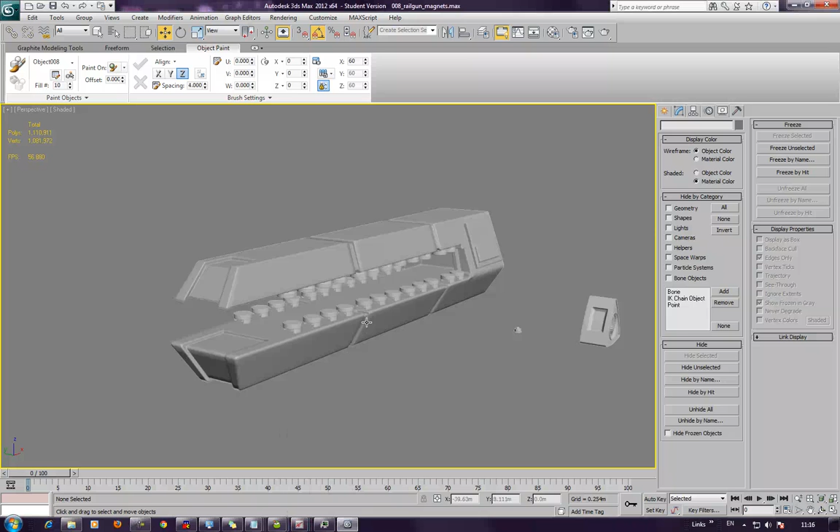Alright, we have basically an array of magnets here now. They look a bit like crocodile teeth, truth be told. However, the idea is that you have this kind of LIM array and it's going to shoot stuff out, and that's going to be cool. Okay, this is our interesting shape that I quite like.

Now, it's supposed to actually be part of a prop engine array. However, I don't see why it should just be a prop engine array if we can use it for other things, which is kind of what I want to do, to be honest. I mean, look at it, it's lovely, lovely. Oh, lovely you are, lovely. Sorry, I just like saying that word sometimes.

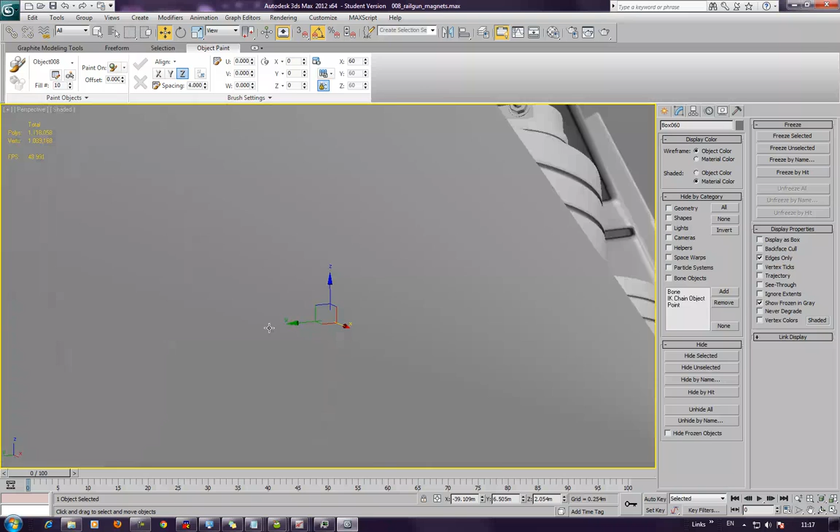Okay, so we're going to assume, kind of... why are you not moving? Oh, you're saving. We're going to assume that this is quite a lot smaller than it is, just so that it fits inside it. And we're going to bring that down to there.

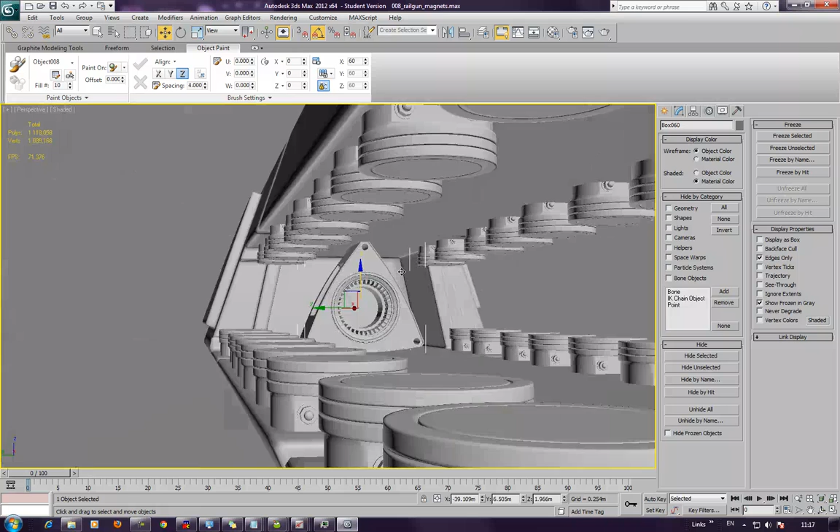Now you'll notice we have these handy dandy holes in here, and I never ever considered when I was building this that I'd be using it for a big robot railgun. In actual fact, when I first started building these sets, I was like, oh, I'm gonna make a transformer, which is a cool plan, but I didn't.

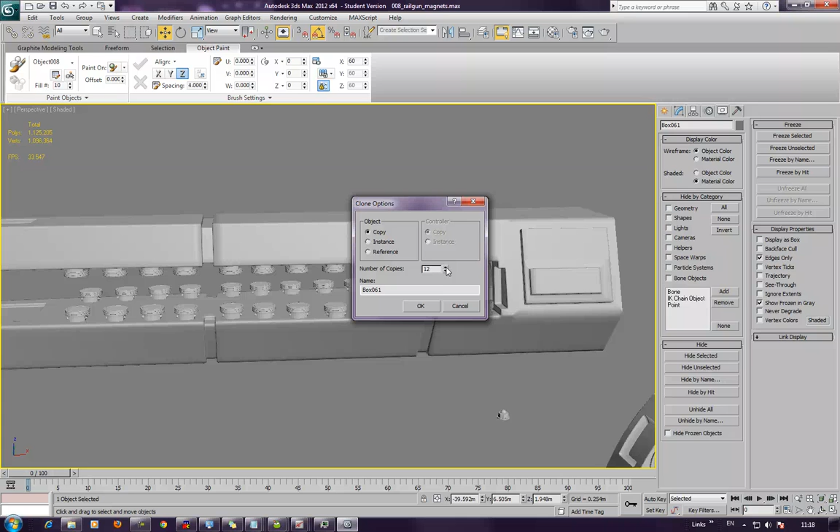And there's a reason I didn't, incidentally, so don't get all like, oh, why didn't you? I didn't because there's already tutorials on that sort of thing anyway. Some really good Japanese ones, a couple of good American ones, from Gnomon. Don't hate Gnomon, I advise you. If you like their stuff, use their stuff. But what I wanted to do was build a little something slightly different.

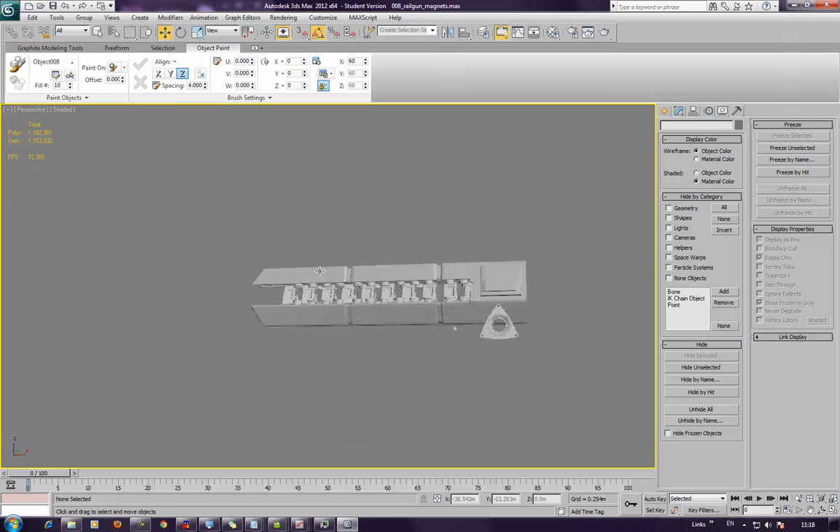It was kind of custom to me, so I felt that by the time I'd got anything even remotely close, then it would probably be too late, really.

I think it'd probably work out better if I lined these up with magnets, because then that would have more semblance of order to it. And then keep that one there, yeah? Do you see where I'm going with that? I hope you do.

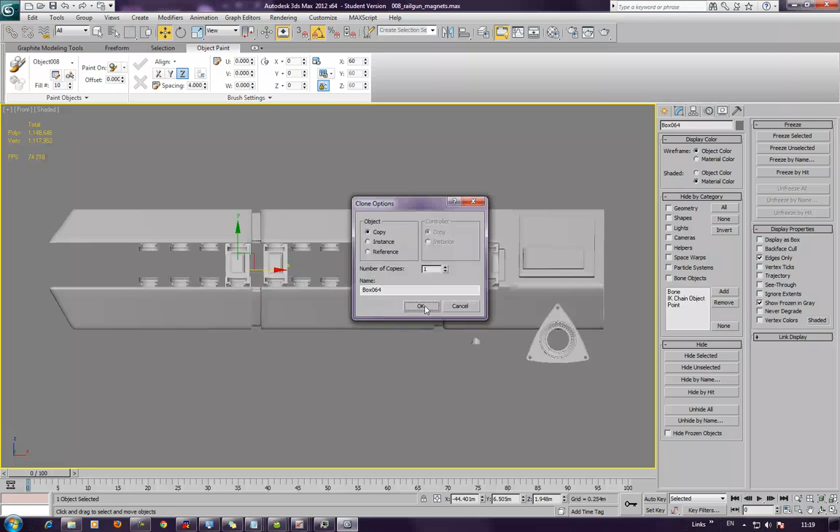Basically stick them in between the magnets. I don't want to overcrowd the inside of the weapon, you see. It's, in my opinion, it's kind of going to be silly if I do.

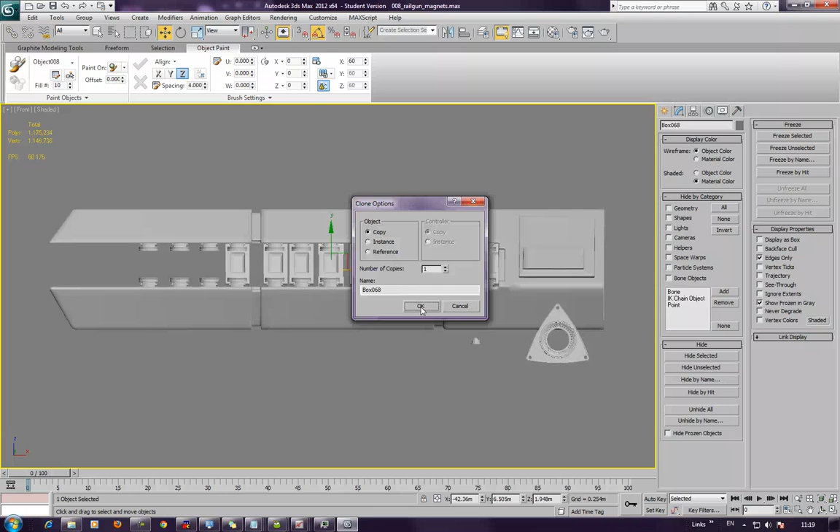I could add kind of a plethora of pipework and tubing to this, and I may yet. So don't think you're off the hook, because you're not.

I would actually like to do that in this section. You're like, oh, why? Why, Chris? Because we want a model that looks good, that's why.

How often have you looked on 3D sites, where they have galleries, and gone, oh man, look at that, I wish I knew how to do something that detailed. That's the whole point of these tutorials.

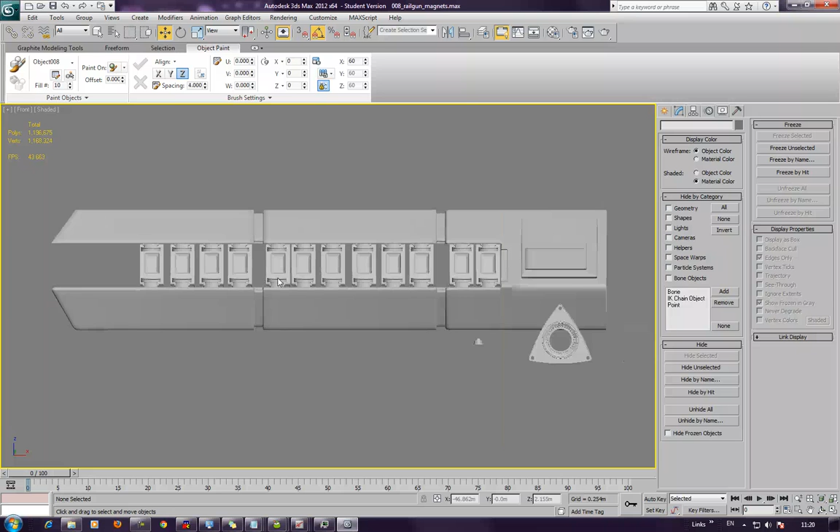It's not just to make you sit and watch me whiffling on about unfortunate friends who had tragedies, or the state of my pets, which is just filler, really. Whilst you're watching me doing this, I just need to keep you interested so that your brain stays awake long enough to absorb what I'm doing.

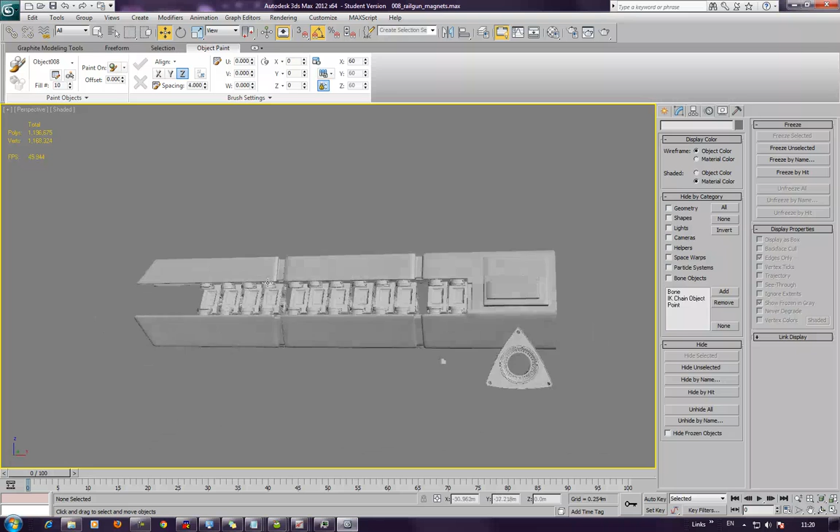This is also a way for me to get your skills up, you know. I want you guys to be really, really, really proficient 3D artists. That's why I'm doing this, which is stabbing myself in the back, really.

I mean, if I wanted you guys to be crap artists, I could probably keep you guys as customers a lot longer by selling you shoddy training. But shoddy training, not good.

Right, now remember what I said, I'd like something to come out here. So, what I can do is I can work on this piece, or I can work directly on this piece. I think I'm going to work directly on this piece. And this is going to take a little bit of effort.

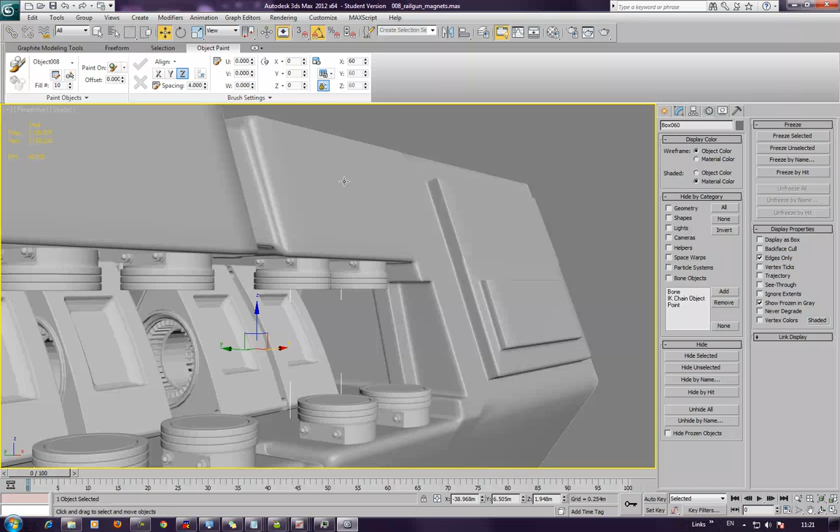Now I could have it literally come out and plug into this magnet and this magnet array, which would be cool. Or I can have it come out and plug on the side of the gun, which I think would add a little bit of over chunkiness that I'm not comfortable with. So...

I'm going to just zoom in, and again I apologise for the fact that the darn thing has its issues now and again.

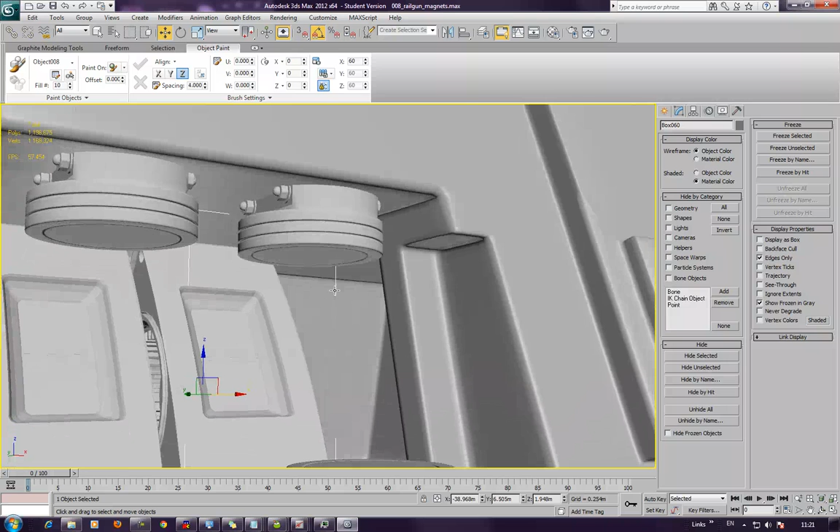And what we want to do is create some wires and cabling that are going to come off this and plug into there, and we're going to do it on both sides. So let's take this and its friend here, and this one's friend here, hide unselected, or isolate even. Move my isolation box down here where it's out the way.

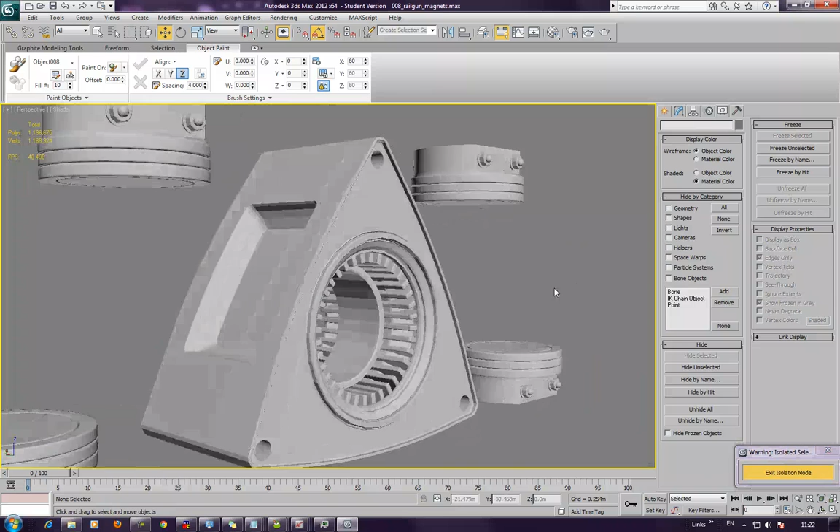So what we need to do now is find a way of connecting these together. Now important, remember, these are at different distances all the way down, so if we create a static model, dynamically it ain't going to work as well. But remember what we did with the splines, and splines are adjustable.

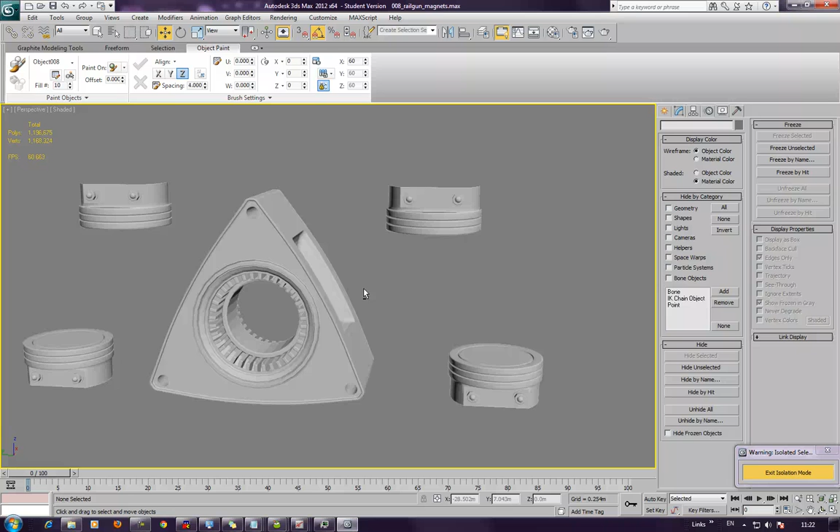Gets good at this point, doesn't it? Or we can use hoses. Hoses are also adjustable. You ever used a hose? We can use a hose. Make a nice change. Let's go over to space warps.

No, helpers, yes. Dummy, yes. Use auto grid. I'm going to pull out 2 dummies. One here, behave you. Just going to wait patiently. Save takes a minute or two when you've got really big files. So one there, then one next to it, just about there. Just don't let the boxes overlap if I can help it.

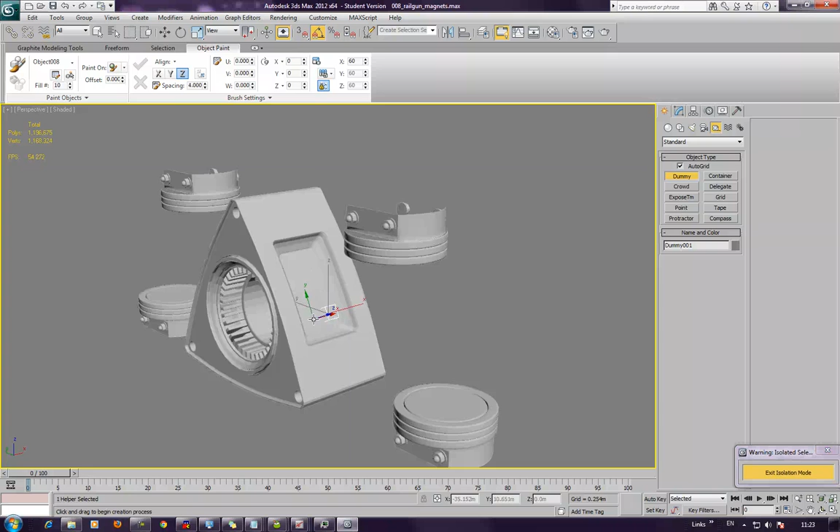Okay, now I'm going to put another pair of dummies. One here. One here.

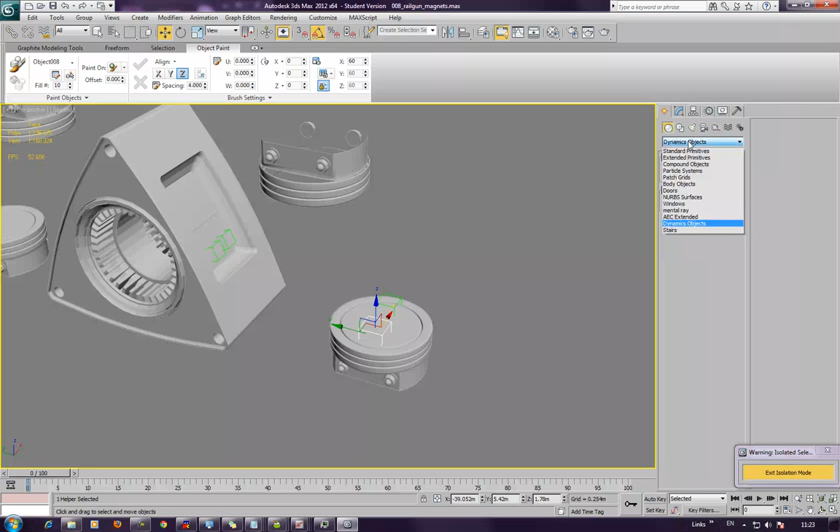Okay, next I'm going to get some hoses. Hoses are just down here in our create tool, and we want to create a, where is it now, dynamic object? No, that's springs. Springs are cool. I think it's an extended primitive. It's been a while. Yep, there it is.

Now you'll notice this funkadelic shape here. There, don't want that. So we can turn off the funkadelic shape. Let me just move this isolated window over here.

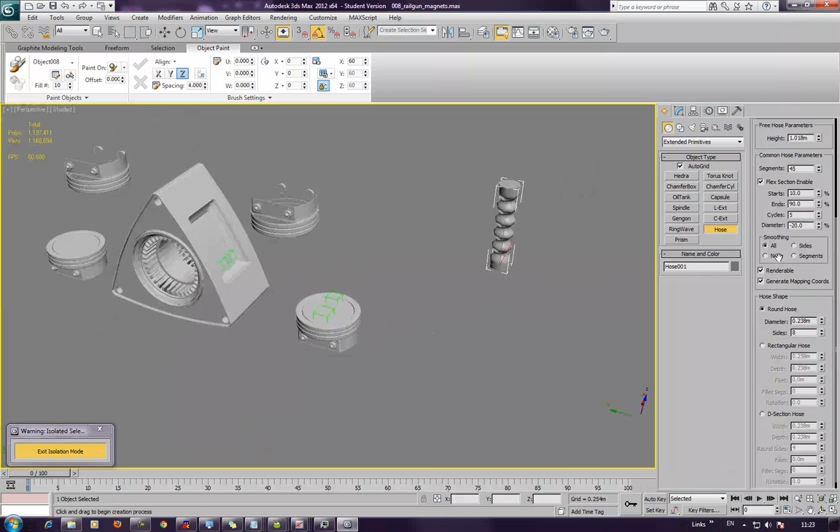Okay, and flex section de-enable. Press F4, you can see it's got myriad little bits and bobs. You can change that down because we don't need tons. To be honest, about 12 is going to be enough, I think, for the minute. And then if we go to our round hose type, you can change it as well. We've got D sections and stuff, but round hose, increase the sides to round about 15 or 16. 16 will do probably. Actually, sod it, 22.

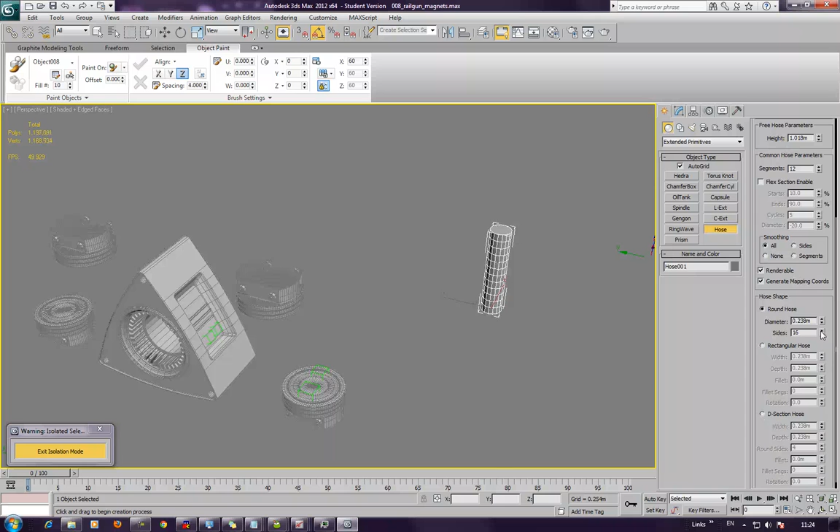Did that make any sense to you? Nah. Okay, go up here, and we're going to make it bound to object pivots. Now, remember we made these dummies, it's not just because they sound funny. Just going to go into the modifier panel for our hose, pick our top object, just wait until it goes to this dummy here. If you have problems, hit F3.

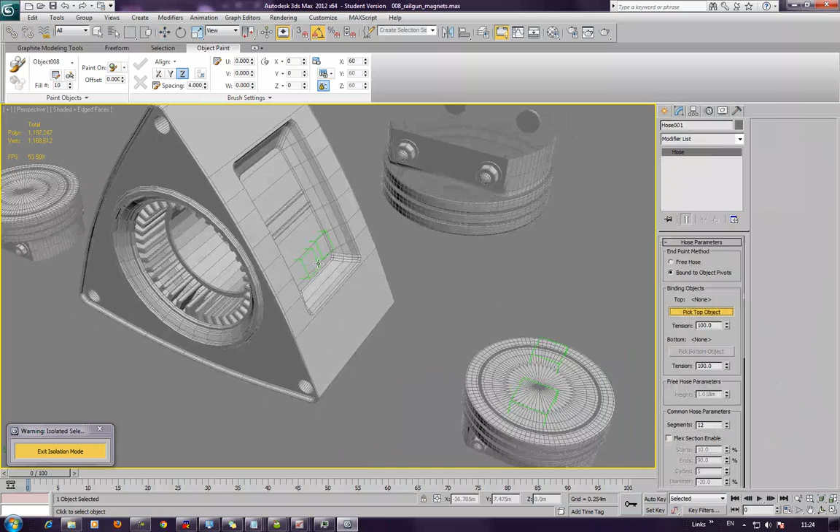Okay, it's got a box 60. We don't want box 60, we want it to go to a dummy. You see this middle mouse button? I can't even afford to get myself a replacement mouse at the minute, which is annoying. So that's dummy 2. Then down here, and I know you think to yourself, oh, he's a millionaire, he makes tutorials. Yeah, yeah. Whatever.

Okay, pick bottom object. There we go. Right, look at that, isn't it beautiful? Right, why's it done that? It makes no sense. Yeah, it does make sense.

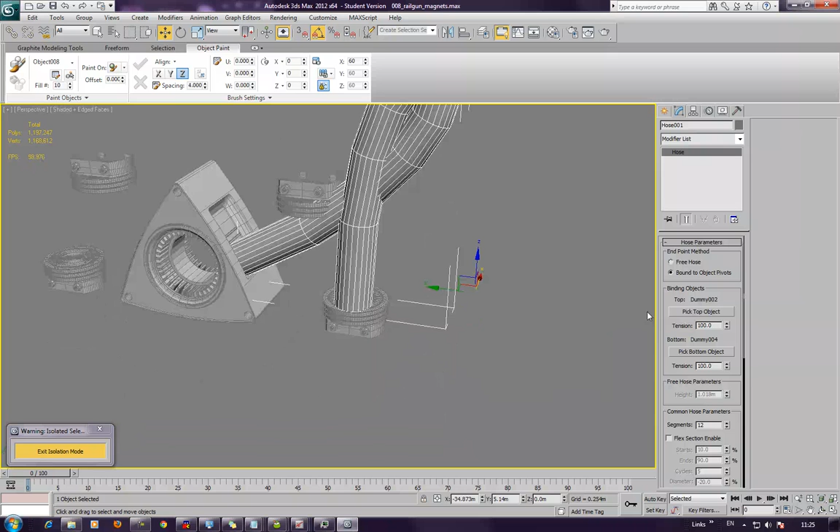Let's have a look. First of all, the tension's at 100, so let's reduce the tension, rather a lot. Secondly, the way that this is placed, our dummy object down here, our dummy's rotation's wrong. So we'll fix that too.

1 minute. Rather than duplicating this over and over again as well, I'm going to delete this dummy and just duplicate the entire process. There we go. So if we take this dummy here, just selected, I'm just going to my rotate tool. If I just rotate it 90 degrees, 180 degrees, see, it's fine. Absolutely fine.

So now, to go here and change the diameter of my object. Like so. Okay. And then, if I go here, and just, bloody thing. Hang on. Right, sorry if I seem a little bit disparate.

I had to pause for a moment, a little bit of a problem I had to deal with. Right, let's see, I think I want to reduce the diameter a little bit more. I'm going to say radius, but it doesn't give me the radius option really. And then I want to duplicate this. I'm just going to grab all the parts that make it up.

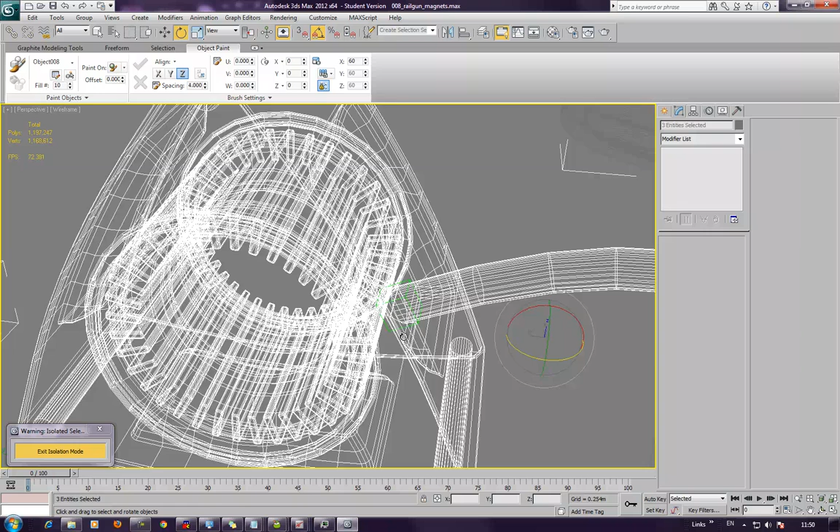Like so, not you, you. Fine, I'll just mark you, grab it if I have to. There we go. And then deselect this piece. And if I go to my move tool...

You'll notice that's moved across for some obscure reason there. I think I must have accidentally dragged it. There, that's better. Do it again.

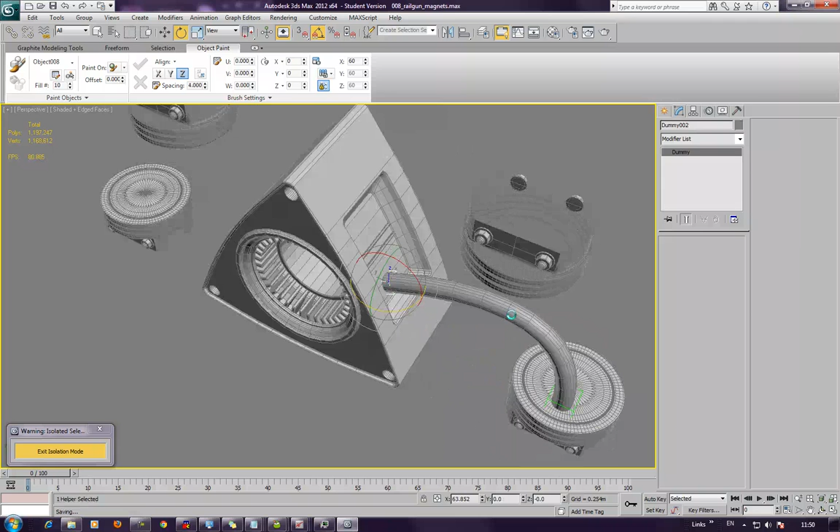There's a cat on the back of my chair again, but never mind, I'll live. Oh, now it's walking across my printer. Now it's doing cat things really.

Okay, so we've got these pieces here. What I'll do is do this, and just click OK, and the hose will now bind to the second set of pivots. Okay, didn't used to do this in Max. It's actually a fairly new thing for it.

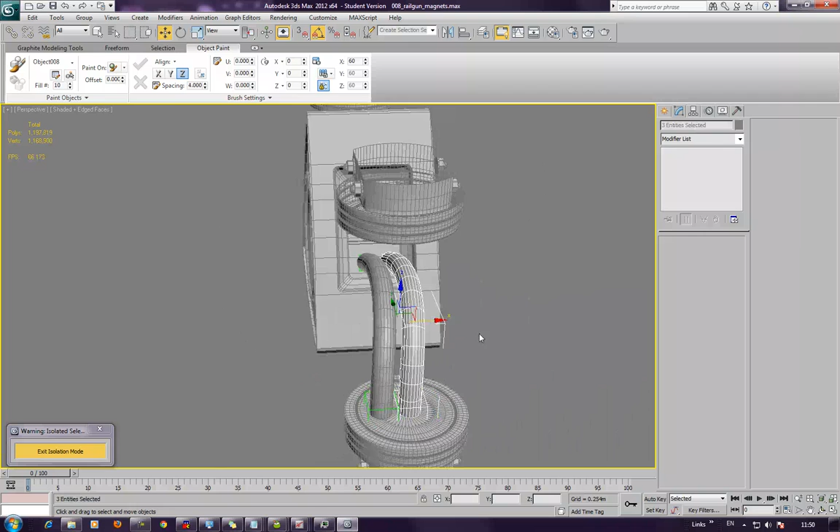Now what I can do is take the second dummy area just there and do that. So now we have two hoses coming out here, and then we can do the same again and have two hoses kind of coming up here. If we adjust the tension a little bit on these, okay, the tension's basically the...

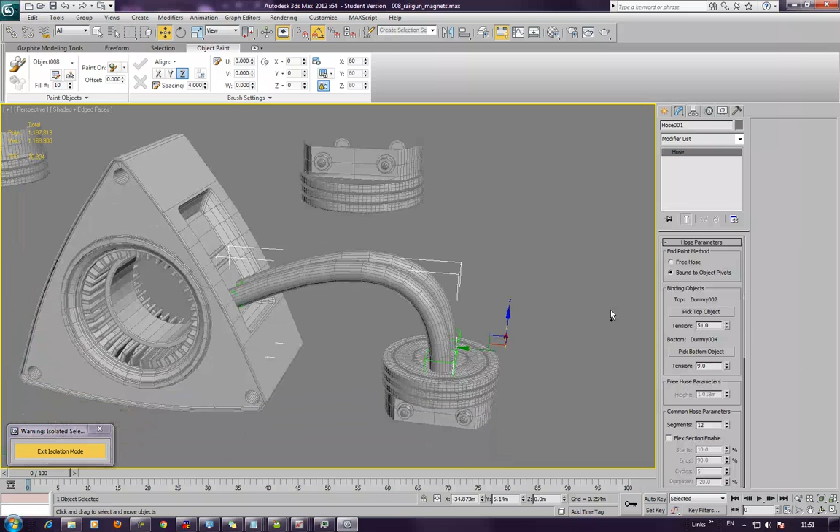I'm not actually seeing that too well there. And one cat removed from my desk.

There we go. If I adjust the tension anyway, like I'm saying, to about 10 on each side, that should reduce the amount of hoseliness that goes on.

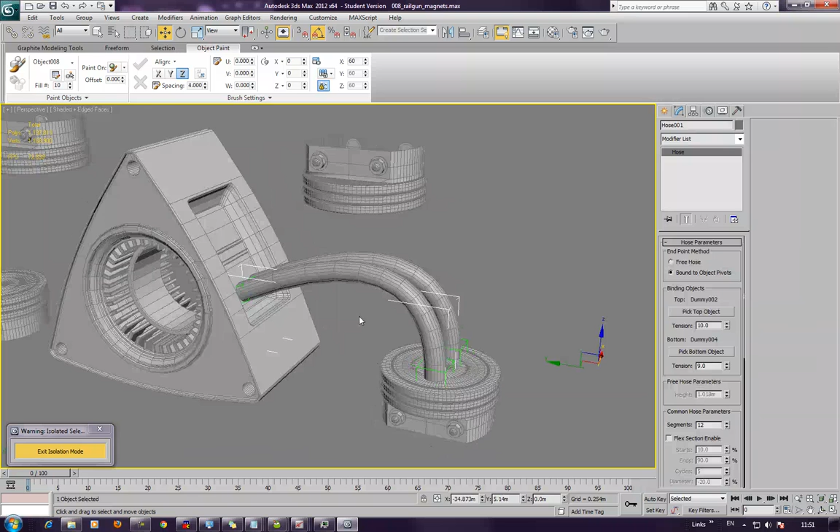Although for some reason I'm not seeing the hose at the moment. Go figure. Let's just undo that. There we are.

Darned thing. Right, if I convert this to an editable polygon, you see the bounding box is all screwed. What if this is an existing bug in Max or something? Probably is.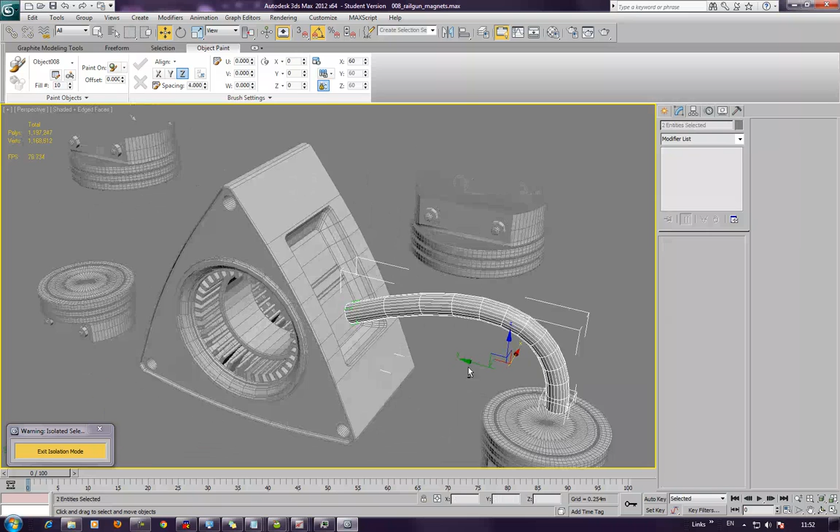I'm going to recopy this. I've never actually hit this error before, and I'm quite curious, so I'm going to keep my recording going. You know what I'm like, I'll keep it going in a storm if I have to. So just duplicate it again. Interesting.

Right, what I need to do here is increase the segments in my hose, because there's not quite enough for my liking, so 17 is probably good. This one's only got 12, so I'll move this one to 17 as well.

Okay, it's interesting this, because when I make changes to it, you'll notice that it hasn't actually carried the changes on.

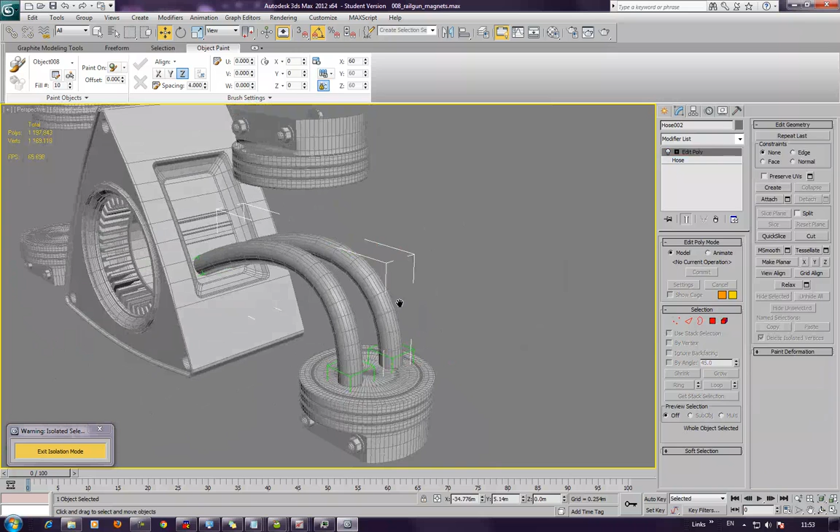I detect subterfuge and mystery. I don't like it. I think I'm just going to use edit polys. Not edit polys, edit splines. Solid. So we've already hit the wall for this one, and it can bugger off.

Right, so we've got our two dummies here. We may as well make use of them, eh? So what I'm going to do is basically come out from a line from here to here.

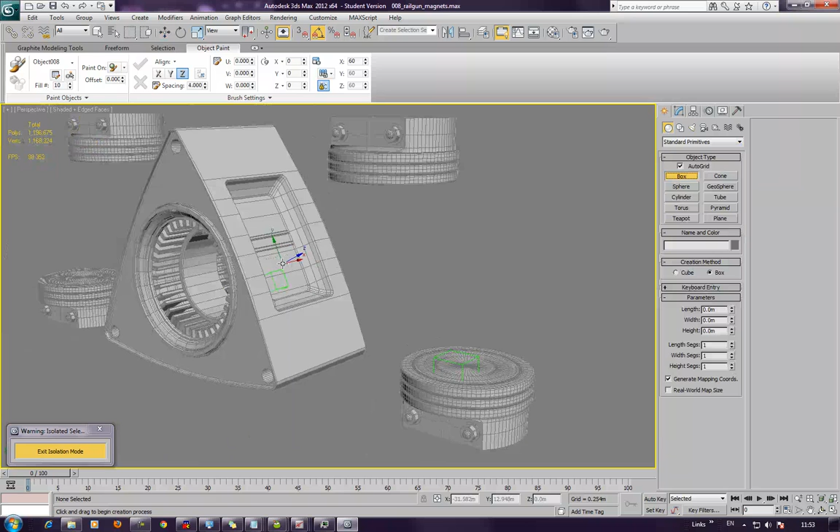I'm going to just draw my box. But you're thinking, why did he do that? And he hasn't even deleted the tutorial. Well, it's an alternate way of doing it, and frankly, this is irritating me, and I'm doing it this way instead. Do I need any more reason than that?

There's a cat scratching things that I'm going to have to kill in a minute.

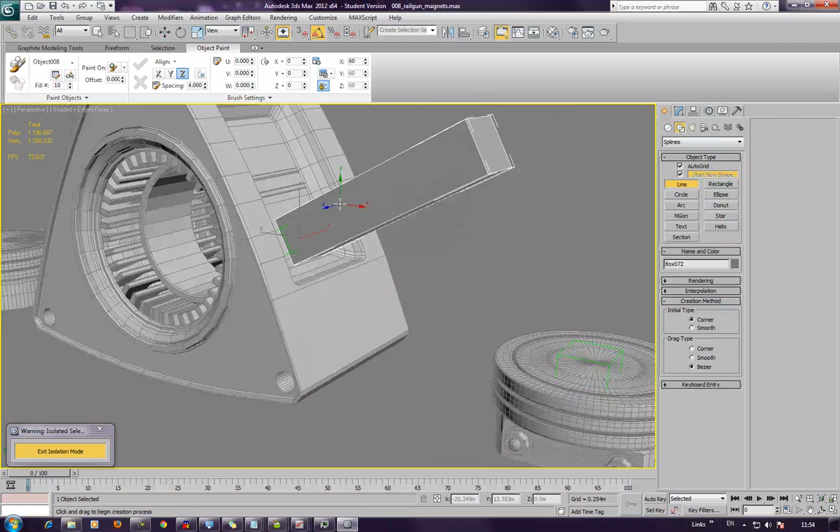Anyway, splines, lines, Calvin Kleins. If I just have a simple line with just three vertices in it, so 1, 2, 3, just get it buried all the way through in here, like that. Okay, I get quite a lot of control power over that.

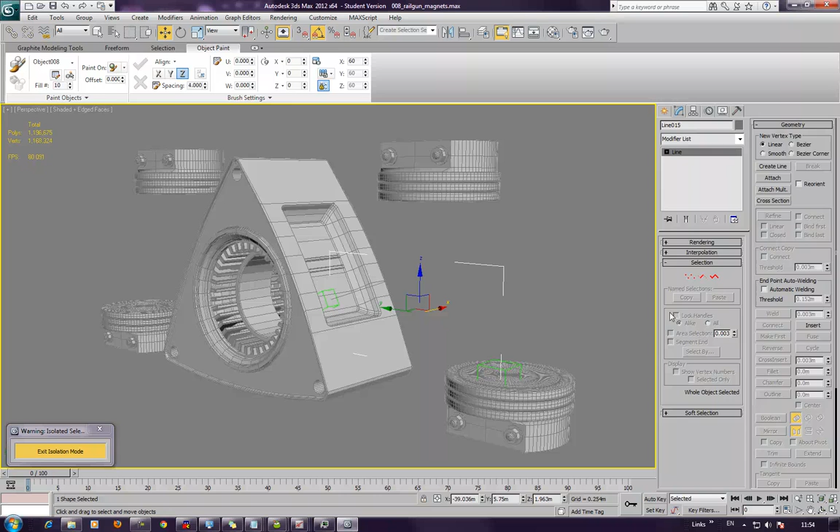I'm just going to move this away, select my line, and just go to rendering and just enable in viewport. It's not so important about the enable in renderer bit.

Now for the line, I'm going to select this line part here and just do a smooth. So you'll notice that this now transitions across like that.

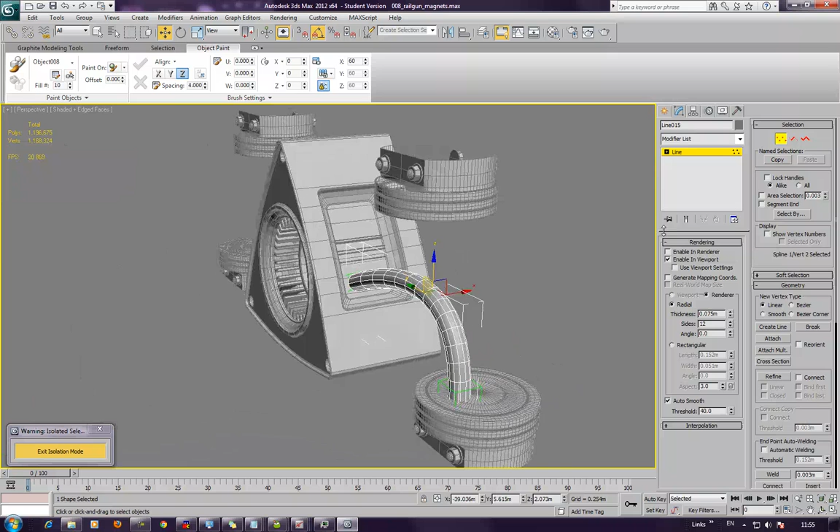Okay, now I need to increase the thickness of my line to what it was with the other one. And if I go to the interpolation, I can increase the segments a little bit. I think 12 steps for this much is probably ideal.

Now I don't need the boxes anymore because I'm just literally using splines. So I delete that, and that. There we go.

And then I can just copy this across, you see, very easily, as long as I can select the line itself, hold shift and just drag it. Let me get 2 copies. Yep, simple. Anyway, back to this one.

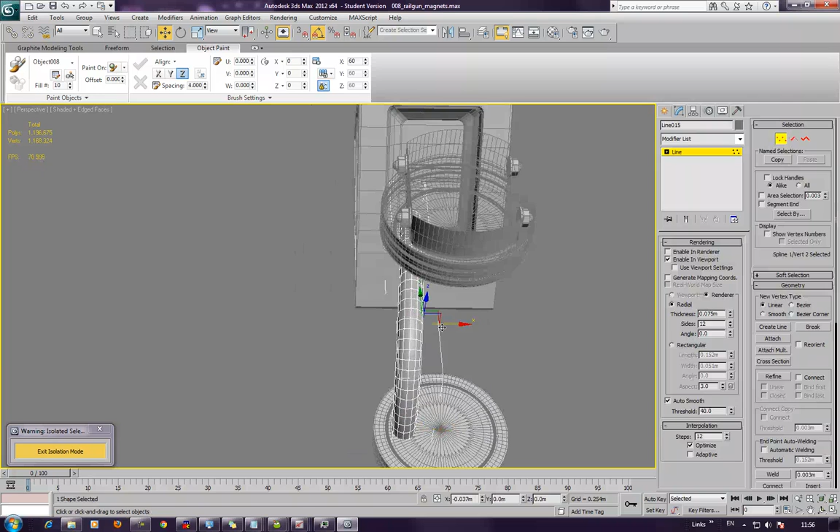Select the line, select the bottom part of the line, move that along to there. Now, because I'm doing this, I'll need to move this part as well, like that. Okay, that's good.

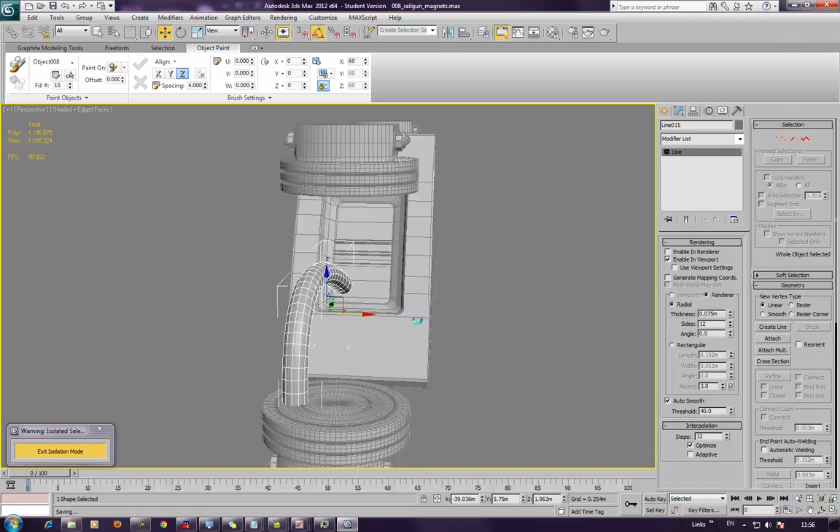Now what I need to do, ideally, is make the copies I'm going to use of this. So, if I just turn off line here and just do a shift and drag, wait patiently for save to do its bit. Save loves doing its bit. There we go. We won't get quite as many weirdnesses going on now, you see.

I like hose, but sometimes it can be a little bit weird, and then sometimes you have to create each hose individually, and then sometimes horrible things happen. Okay, let's see, maybe move this bottom one across to this edge a little bit more.

It's important we get this right the first time, really. Put those in there. That's good.

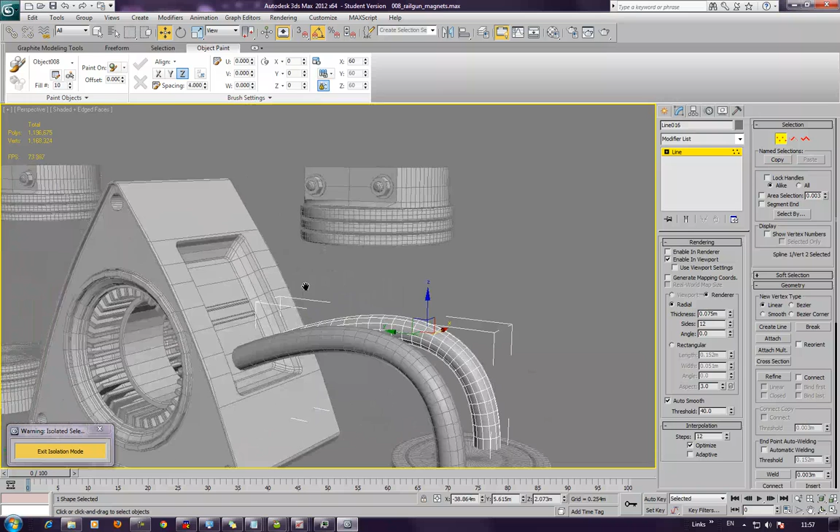Next, I'm going to make another 2 copies of these lines. And this time I'm going to go to there. Actually, I might lower them down a bit, just have them come in there. Makes slightly more sense.

And now if I go to my endpoint, start moving things around a bit, just get them into the right area, which should be round about the middle of this, to be honest.

Just try and rock it until I get the top part about straight, which is there. Okay, that's good.

Now this one's still in the wrong area, but what I'm going to do instead is just delete it and duplicate this one instead, because it's going to be easier coming from this side.

Okay, get them in more or less the same position. Open the line tool out. Just move the end line in. And that one too.

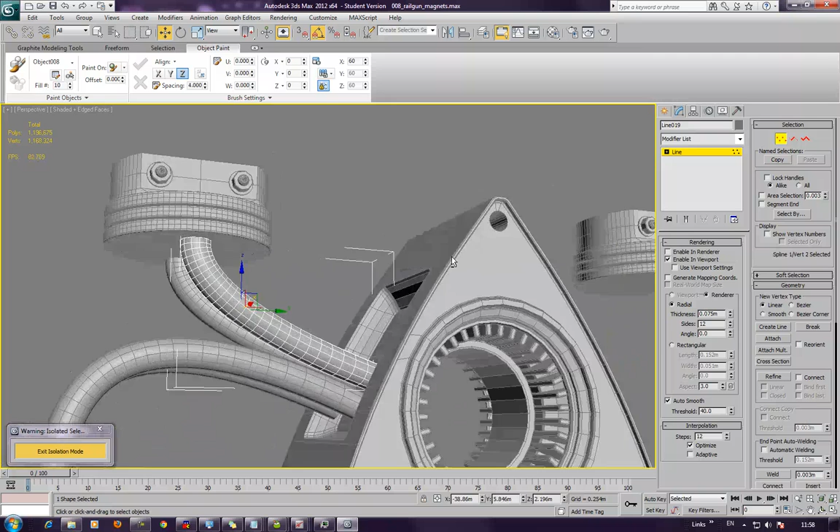You can add an extra vert if you really feel that you can't do without it. You'll notice these are slightly angled. We will be using tricks to get away with this. Naughty tricks, bad ones - they'll make you angry.

Okay, so we've got our lines. Let's attach all the lines together. There we are. Now what can we do?

Well, we can stick an edit poly on top of them, I suppose. Good thing about edit poly is, you see, that if I then grab this and do an extrude

like that, and then drop down to my line, don't show this again, and show end result - you'll notice it's still there, and if I open my line, I can still move parts. See? Madness, isn't it? How does it work?

We don't know. Right, back here. Anyway, need to make sure this is turned off. Back to edit poly. Now, I'm not planning on animating this,

which is going to make this considerably easier, to be honest. What I really just want to make sure is that I've got my hoses looking like hoses. That's the important part.

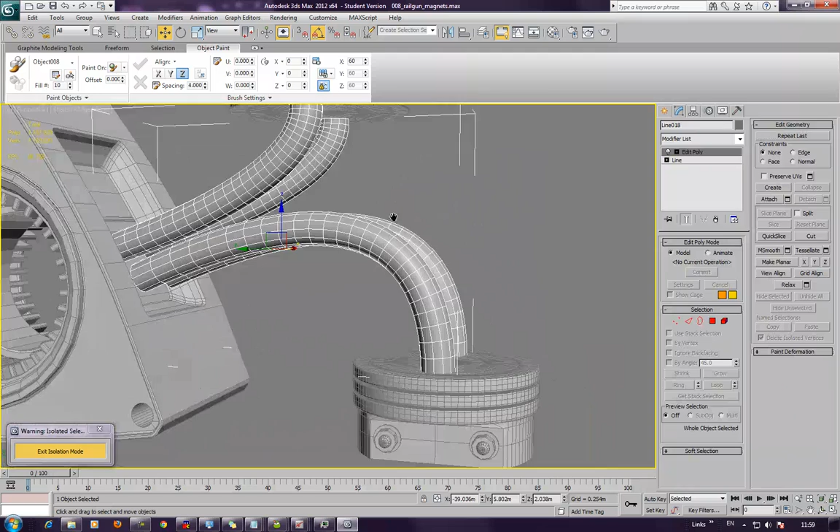Okay, I'm going to look at this and do a slightly different way to the previous one. So I'm going to go here, and then I'm going to miss 3, here, here, there. I'm finding newer, faster, funner ways to do it.

Oops, that wasn't a fun way to do it, was it? There. There. There, why not? Do it again here.

Okay, come out there, just trying to keep it as even as we can. We're going to get some interesting shapes here, so don't worry.

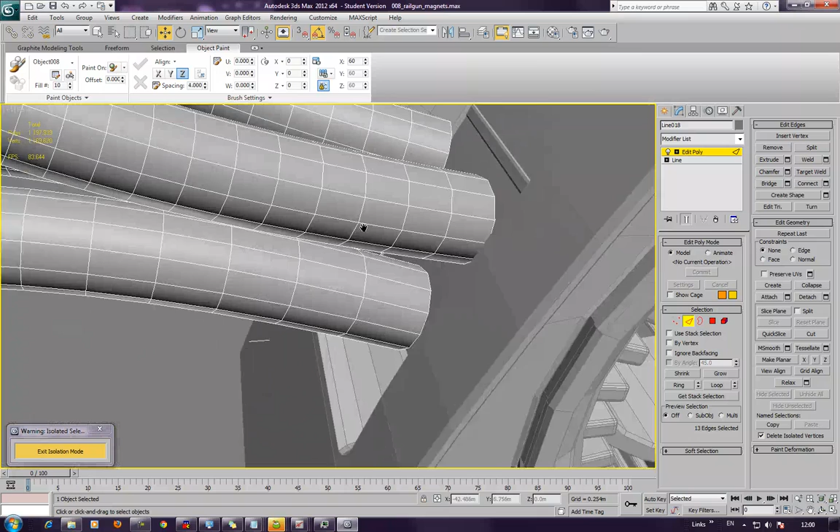Good thing is we don't have to make the hoses even, because if they look completely the same, then people's eyes are again drawn to symmetry. Remember, in the same way they're drawn to symmetrical faces, they're drawn to symmetrical objects too. Weird how we're designed, isn't it?

And yes, I could have used the hose and the weird kind of inset-y thing that it does, but I don't like it. Okay, let's do a ring.

Let's wait for save. You done yet, save? Of course you're not. Okay, click ring. There we go.

Got too many rings over here, in fact. Let's see, I'm going to deselect this one. Okay, ring.

Make sure we haven't got any doubles. We don't want doubles. Control, select by polygon.

Okay, and now we're going to inset it a little bit, so we just need to extrude, and we're going to extrude by local normals. Don't bring it in too much because it will look silly.

There we are, like that. Just click tick.

Next, if I go over here - oh, hang on, before I do, I also want to take off our end polygons. Quite important, this bit. It's amazing how often you just don't do it and you forget.

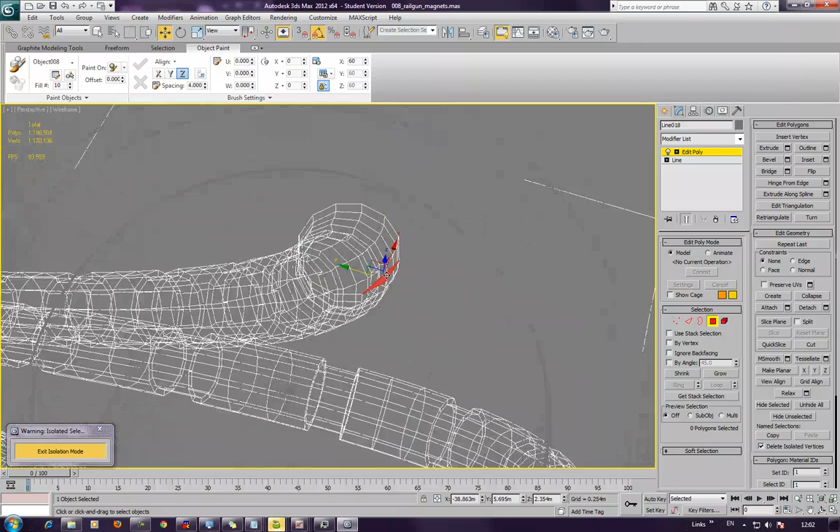And then down here. This one's actually complete in a kind of amusing manner, probably because it's not turned as much as the other ones. There we go. Alright, next.

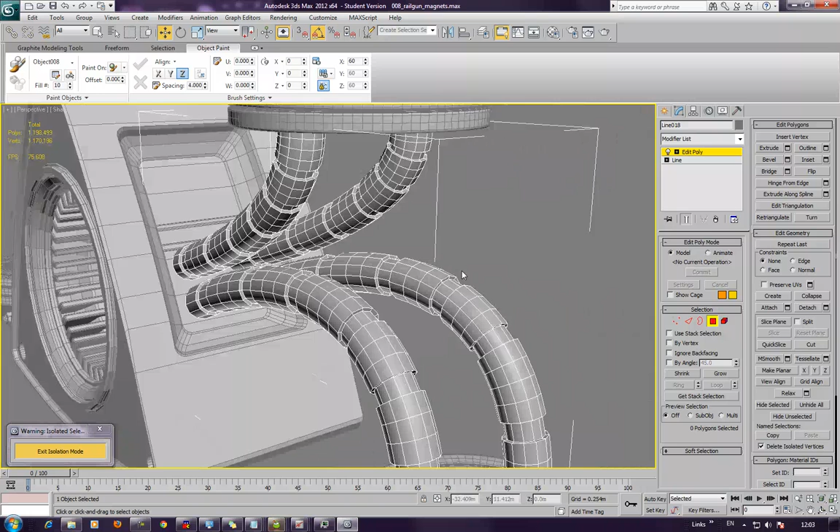So you can see these are still editable shapes, which is cool. Next, I'm going to go up here and use Turbo Smooth. Now Turbo Smooth has obviously made it a teeny weeny bit overly funky, but that's okay.

Don't want isoline display. Go to Edit Poly. Show End Result turned on, you'll notice. Still. Now we can go to our graphite modeling tools and use the Swift Loop function, which obviously gives us a lot more control.

So we're just going to go down and do this. And you're going, oh man, he's got to do this 4 times. Well, 1, it won't take that long. 2, it's going to look nice. Is there 3? It probably is. Can't remember what it is though. Go back to Turbo Smooth and just stick on isoline display.

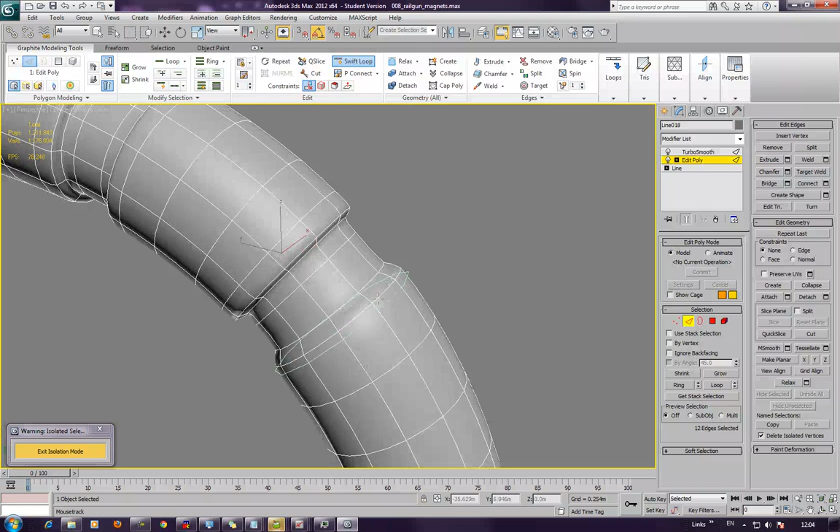Yeah, so anyway, it's going to make it faster and easier. I mean, I could just do 1, I suppose, and duplicate it back into the spaces it was in, if that's what you really want. If you don't want to watch me doing it over and over again, I'll do that. How does that sound? Would that make you happy with me again? I hope so. Then we can be friends. I'll come round, have a coffee. You can show me pictures of your holidays.

You'll notice what a difference it makes doing it this way, incidentally, in just a few. And we're just adding like mad levels of detail to our model.

Wrong one, let's go this one. It picks up the nearest edge, you see. Remember, we had problems with this in previous tutorial segments. Okay, so you can now see the difference compared to the rest.

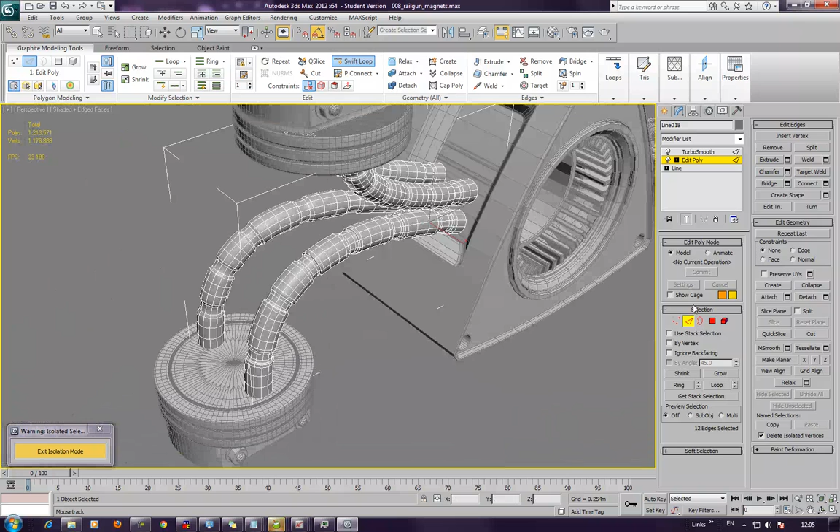Drop back down the line, and I think, if I select by spline, I can literally get rid of them. Like so.

There we are. Now you'll notice it's dropped the... oh god, what's it called? Keep forgetting what it's called. Turbo smooth, yeah? So we've lost the turbo smooth again. Why have we lost the turbo smooth? Doesn't matter, let's stick it back in anyway. Edit poly, swift loop. You're always going to get strange results when you do stuff this way.

But you think to yourself, this tutorial has just been never-ending bugs and errors. Yeah, but you're watching my errors, aren't you? Are you going to replicate my errors? Think carefully. Don't fib.

And even if we collapse this stack, we can then stick an identical looking spline inside it anyway, and just make it an IK animated piece of geometry, which we can really easily set to the right place as well. It's amazing, isn't it?

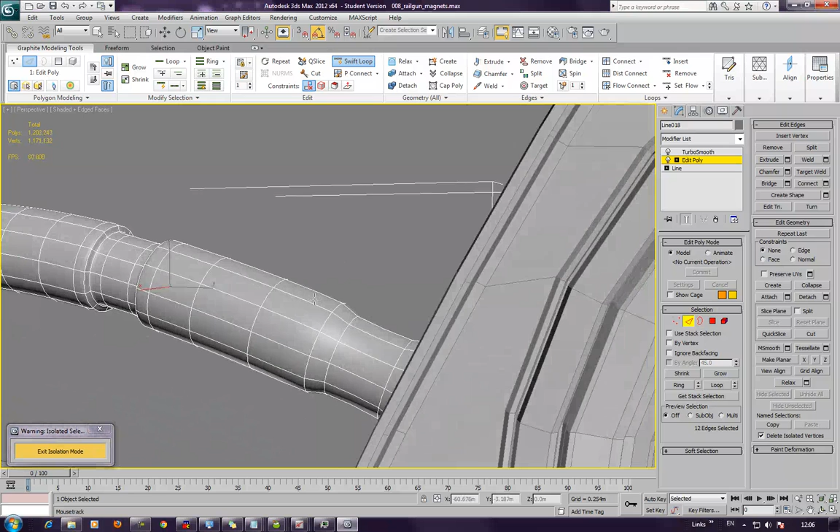You thought probably, oh, the barrel of the gun, we're nearly done. Ah, that's amazing. No. Any part that's a predominantly visible part of a model needs to be considerably more detailed than the other parts. Away it goes. Rules of the road.

Okay, turbo smooth. Let's dump on top of the turbo smooth and edit poly. What we do, drop down to turbo smooth again and turn off isoline display, then go back to edit poly, because otherwise it's going to look a little bit weird.

Okay, over here I'm going to select this edge, do a ring, control select by polygon, just extrude it out a little bit. You notice I don't have group extrude on, so I'm going to extrude by normal. Sorry, I do have group extrude on. I'm going to extrude by local normals. Once, and then again, like that. Click tick.

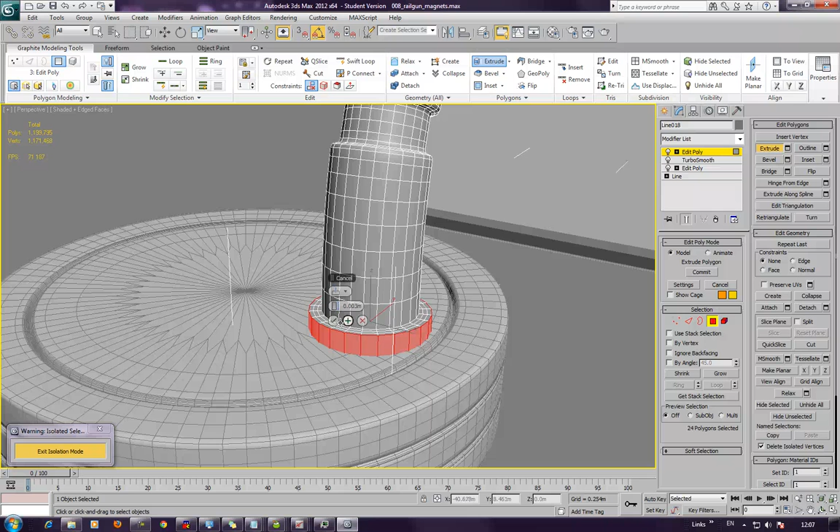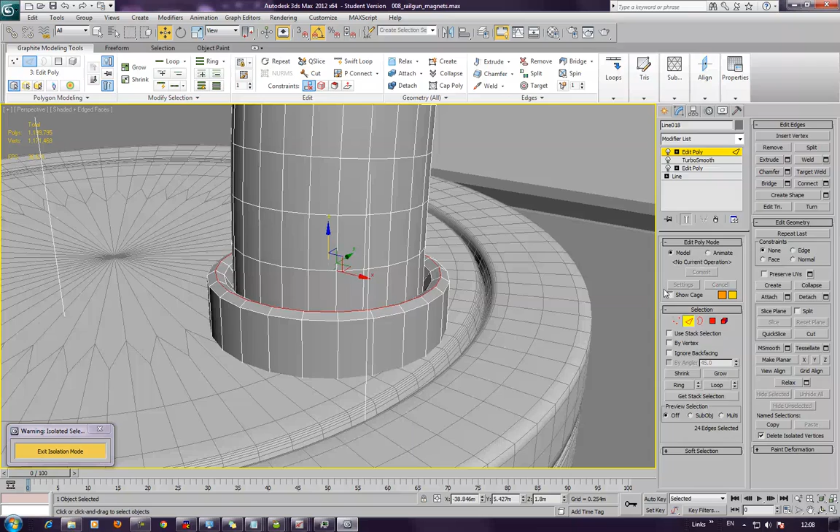And I'm going to select here, here, ring, control select by poly, like so. Now I'm just going to bring these up, like that. Now I'm going to select this middle edge here, do a loop, and bring that up. See, so it's all the same model. It's got its own mounting point built into it now.

Over here, we want the same kind of thing, really, don't we? So, go here, do a ring, do a control select, do an extrude, click the plus button, and again, close it, extrude it again actually. There we go, click tick.

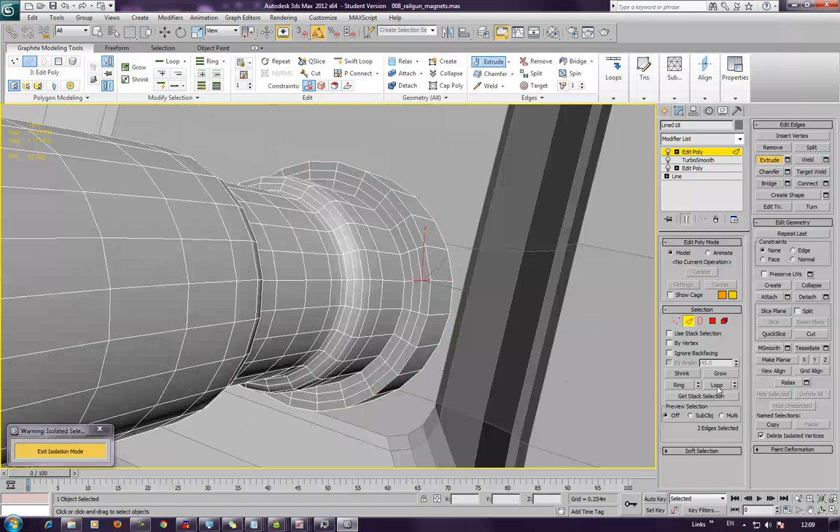Getting a bit closer. Select here and here. Okay, gonna do a ring. Control select by. Now I'm just gonna move this out, just like that really. Oh, didn't want to do it that way. Silly old me. Want to do it that way.

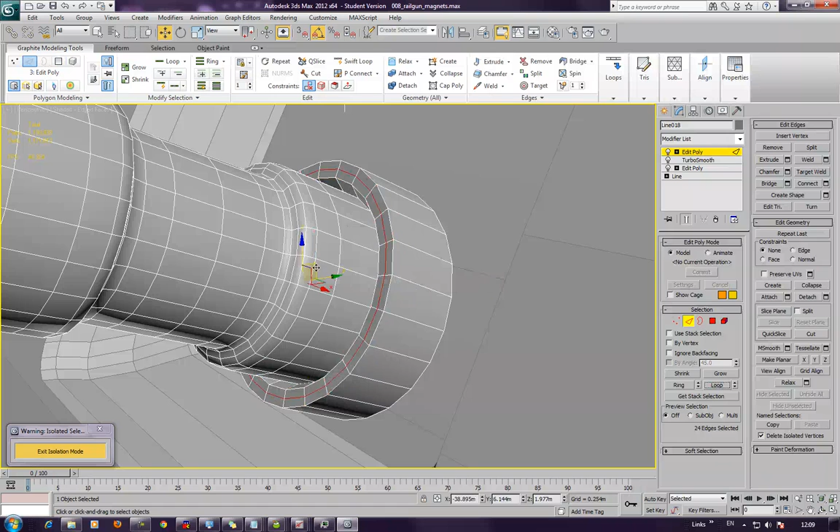Select this one. I'm going to do a loop. Lift it up a little bit. There you go. That's all we had to do. Okay, done quite a bit here, showing you how you can make some amazing errors. Got to stop. Move on to the next part. See you there.